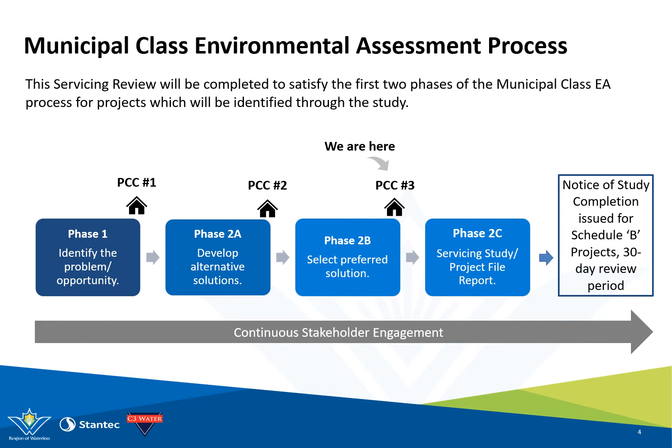As presented at PCC number 2, the following areas requiring further study were presented. 1. Need for future water storage. 2. Need for wastewater servicing in Baden. And 3. Need to consider the future water and wastewater servicing for the Foxboro Green community.

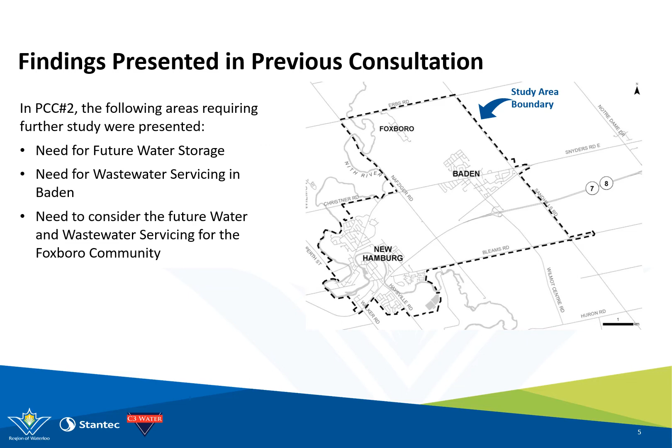The study considered the future requirements of water and wastewater servicing for both the existing community as well as planned growth within the urban area boundary under the current official plan. This map provides an overview of the existing and planned growth within the urban area boundary under the official plan. These development blocks are included as part of the assessment of the current and future water and wastewater systems that service the communities of Baden, New Hamburg, and Foxboro Green, and help to identify the existing servicing constraints.

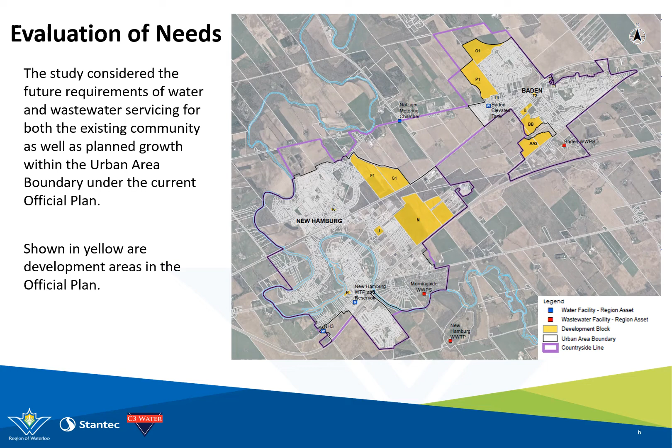The following alternative solutions were presented at PCC number 2 regarding water storage, wastewater servicing, and water and wastewater servicing for Foxboro Green. There are 4 identified alternatives for future water storage. Alternative WS1, do nothing. Alternative WS2, provide increased storage at the New Hamburg water treatment plant. Alternative WS3, provide new storage at the Baden Wells site. And alternative WS4, provide new storage at the Shingleton K50 Wells site.

There are 4 identified alternatives for future wastewater servicing in Baden. Alternative WW1, do nothing. Alternative WW2, upgrade system and maintain existing configuration. Alternative WW3, upgrade system and convey directly to Morningside Pump Station. Alternative WW4, upgrade system and convey directly to New Hamburg Wastewater Treatment Plant.

There are 4 identified alternatives for the future water and wastewater servicing for the Foxboro Green community. Alternative F1, do nothing and carry out necessary upgrades. Alternative F2, provide connection to the existing Baden sewer and water supply system using existing road allowances. Alternative F3, provide connection to the existing Baden sewer and water supply system using a direct route. And Alternative F4, provide connection to the existing New Hamburg sewer and water supply system using existing road allowances.

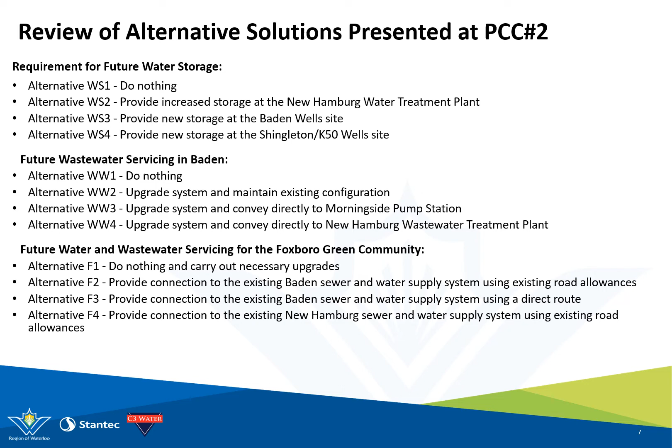The alternative solutions have been evaluated based on their performance against the following criteria categories: natural, protecting significant natural and physical elements of the environment; social, evaluates potential effects on residents, neighborhoods, businesses, historical and archaeological and heritage components; technical, considers compliance with regulations and policies as well as the technical suitability and other engineering aspects; financial, addresses the potential effect on servicing costs. The right side of the screen displays the legend for evaluation scoring used to evaluate the alternative solutions against the criteria.

The scoring uses a rating system: 1. Low alignment with criteria; 2. Not well aligned with criteria; 3. Somewhat aligned with criteria; 4. Well aligned with criteria; 5. Very well aligned with criteria.

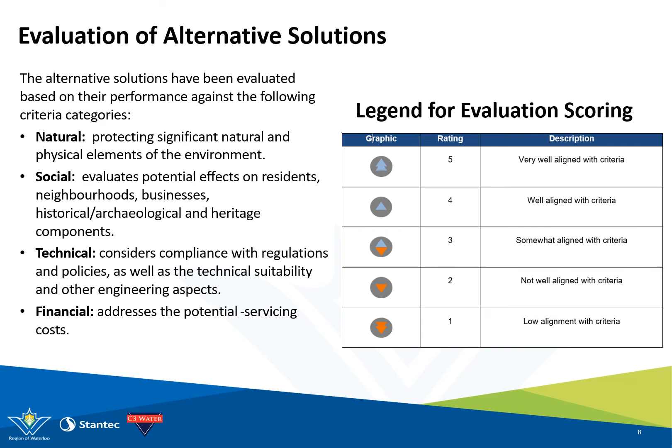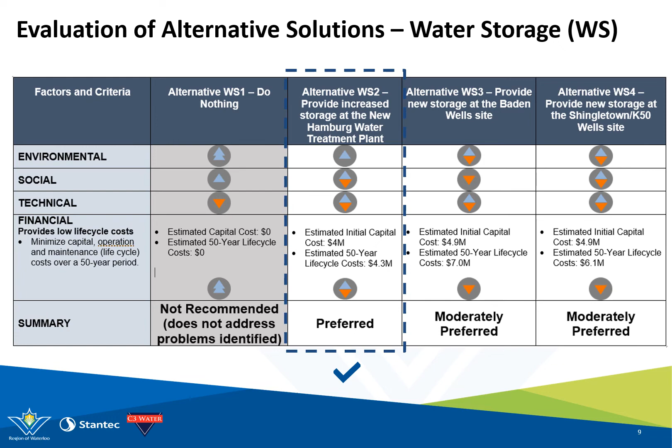This slide presents the results of the evaluation of the water storage alternative solutions. The evaluation determined that alternative WS1 is not recommended as it does not address the problems identified in the servicing study. Alternatives WS3 and WS4 are moderately preferred. Alternative WS2 was identified as the preferred solution.

Alternative WS2 provides increased storage at the New Hamburg water treatment plant and is selected as the preliminary preferred alternative solution for the following reasons: meets long-term capacity requirements to service projected population growth, provides redundancy within the existing New Hamburg reservoir, can be accommodated within the existing water treatment plant and reservoir property boundary, although existing open space will need to be fenced off to the public. Construction will result in temporary impacts such as noise impacts to nearby residential properties and increased truck traffic through the community.

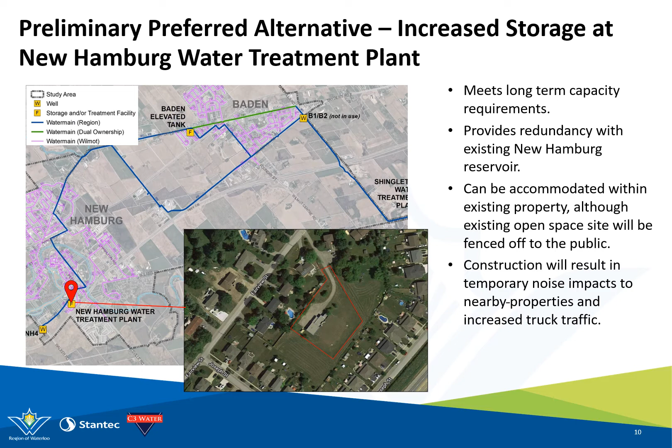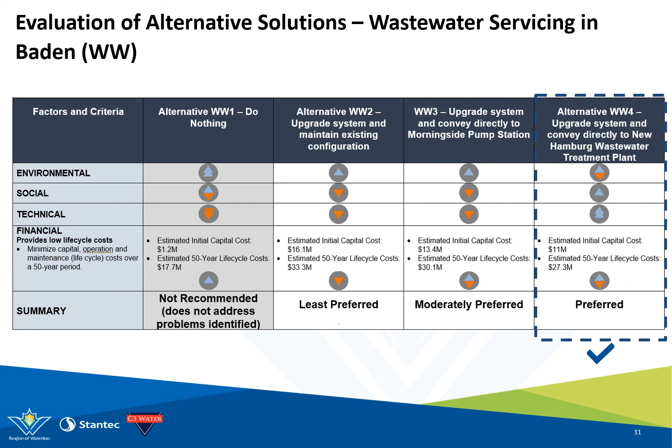Alternative WW4 proposes to upgrade the system and convey flows directly to the New Hamburg Wastewater Treatment Plant and is selected as the preliminary preferred alternative solution. This alternative includes upgrades to the Baden Wastewater Pumping Station and a new force main, a buried pipe, from the Baden Pumping Station to the New Hamburg Wastewater Treatment Plant. Alignment options for the force main were reviewed and the alignment shown as the recommended route.

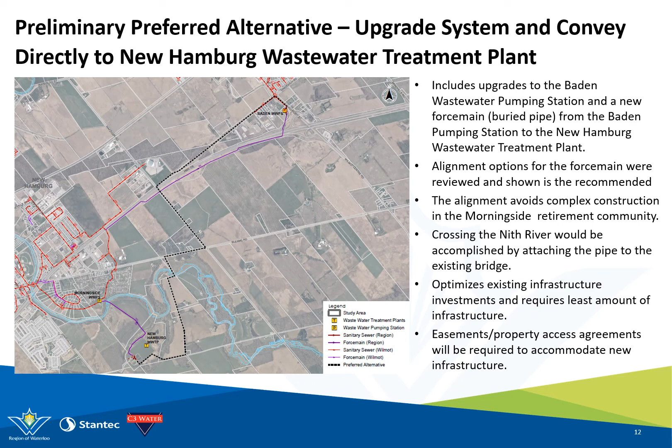Considerations for this alternative include: the alignment avoids the complex construction in the Morningside retirement community. Crossing the Nith River would be accomplished by attaching the pipe to the existing bridge. Optimizes existing infrastructure investments and requires the least amount of infrastructure upgrades. Easements and property access agreements will be required to accommodate new infrastructure, but these easements required are limited.

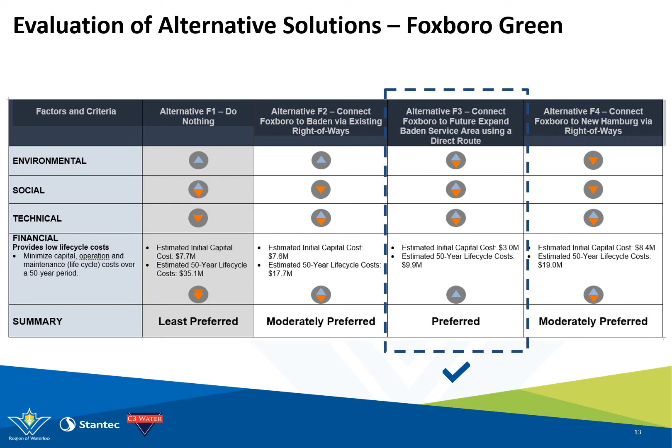Alternative F3 proposes to connect Foxboro Green to the Baden community by a direct route. This connection involves the extension of water and wastewater services by pipes from the south limit of the Foxboro Green community to the edge of the current growth boundary of Baden. Further connection of Foxboro Green will be within services in the future development parcel known as the Snyder's Road Development.

This option was selected as the preliminary preferred alternative solution with the following considerations. Provides Foxboro Green with reliable water supply by the Baden supply system and wastewater services through the Baden and New Hamburg wastewater collection system. Road closures in the Foxboro community may be required during construction, and force main location would require agreements with multiple property owners and stakeholders.

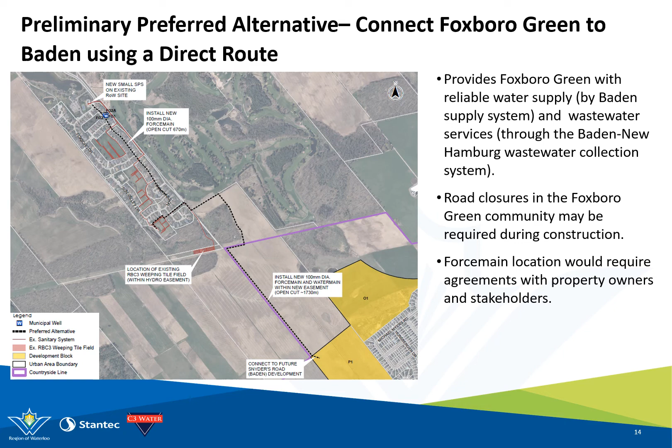In summary, the following projects are proposed as a result of this system servicing study. 1. Increasing water storage capacity at the New Hamburg Water Treatment Plant. 2. Upgrading the Baden Pumping Station and new force main connecting directly to the New Hamburg Wastewater Treatment Plant. 3. Connecting Foxboro Green to the Baden Water Supply System, also connecting to the Baden New Hamburg Wastewater System.

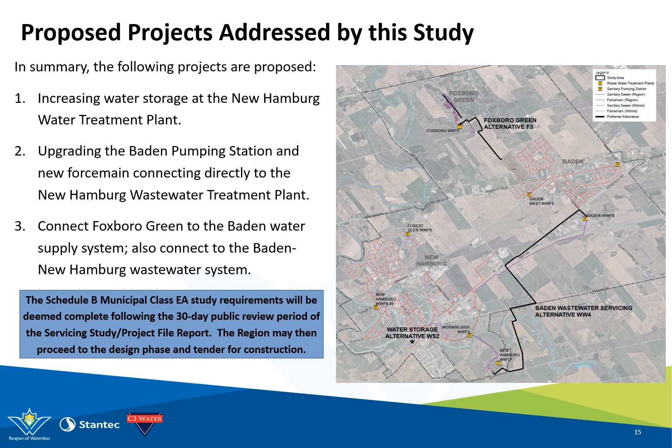The Schedule B Municipal Class EA study requirements will be deemed complete following the 30-day public review period of the servicing study and project file report. The region may then proceed to the design phase and tender for construction. Following this PCC, the project team will review input received on the information presented and will confirm the preferred alternative solutions. Feedback received as part of PCC number 3 will be used to prepare the servicing study and project file report. The report will be available for a minimum of 30 days to allow for public review.